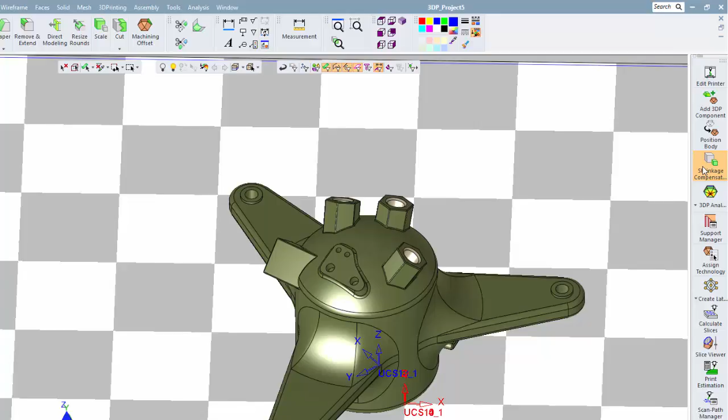We will begin by applying shrinkage compensation to the part model. As each layer of the printed part cools, it will shrink. So we will compensate for this in the X and Y directions while maintaining the same Z height. Next, we will prepare the part for printing.

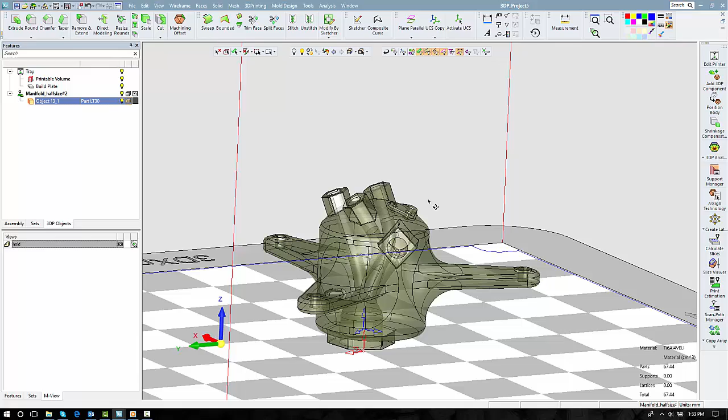Some part features may require us to add material for printing because we will need to machine that away afterward for a good finish. Other features may be very awkward to support, so we may choose to machine those features into the part after printing as well. With 3DXpert's full modeling capability, any required changes to the part can be done easily. In fact, the part itself could be modeled from scratch right within 3DXpert.

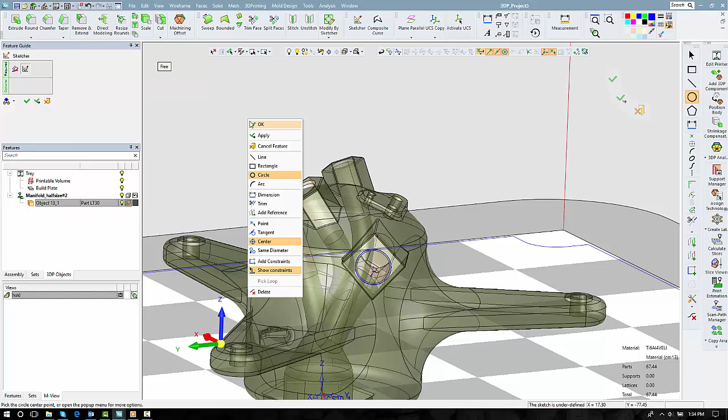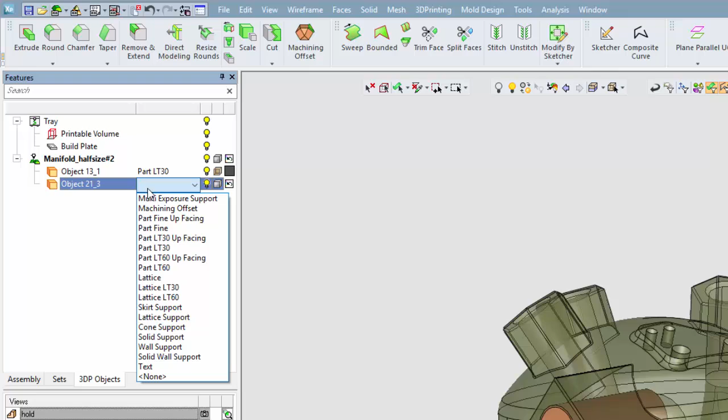So at this point, we're going to extrude a new object that will be included in the printing. This way it will plug that sideways hole that would be very difficult to support otherwise. And since it is a different object, we can include it in the print, but treat it differently than the part itself. Here we can assign a different print strategy. So while the part may be printed in layers of 30 micron, this plug could be printed in 60 micron.

Let's look at another area of the part that requires stock for machining. And again, by treating it as a separate object, we won't need to print it in as much detail as the part itself, especially since we're just going to machine it away anyway.

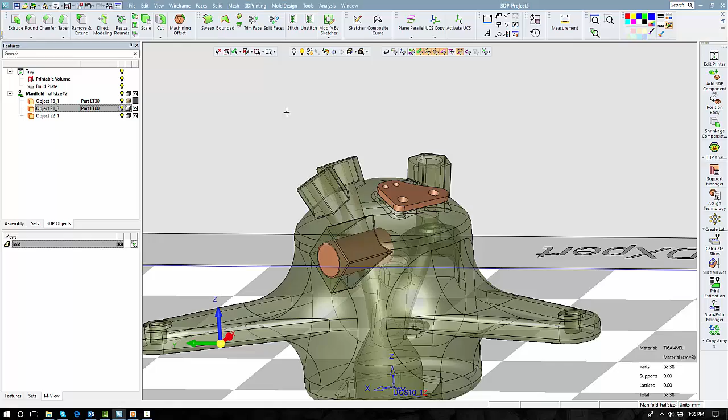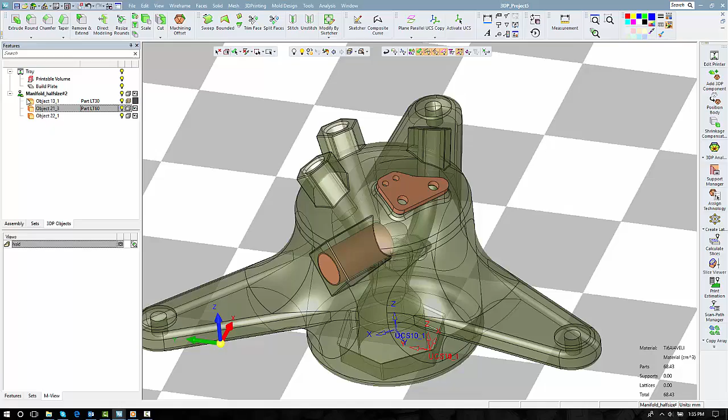Let's now look at a feature called direct modeling. Again, 3DXpert can do all of this modeling because it will work with imported CAD models. This time we're going to actually change something on the part itself. We would like the ring or shoulder around the three outermost holes to be bigger. So we'll use direct modeling to offset and increase the size. And this, of course, adds more material to the printed part in those areas.

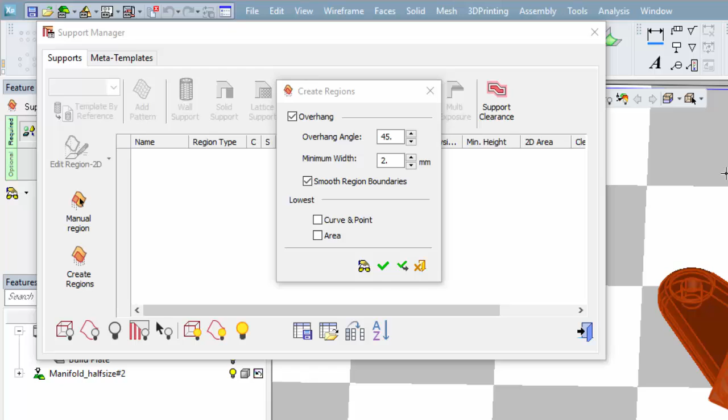We will now discuss the next big topic of this video, which is adding supports for printing. The first thing Support Manager does is help us define the overhanging areas that will require support. This will be based upon how much the machine can handle. Once those regions have been defined, they will be shown as boundaries on the part and also listed in the tree. So again, these boundaries have been created based upon knowing that the machine can handle a 45-degree overhang.

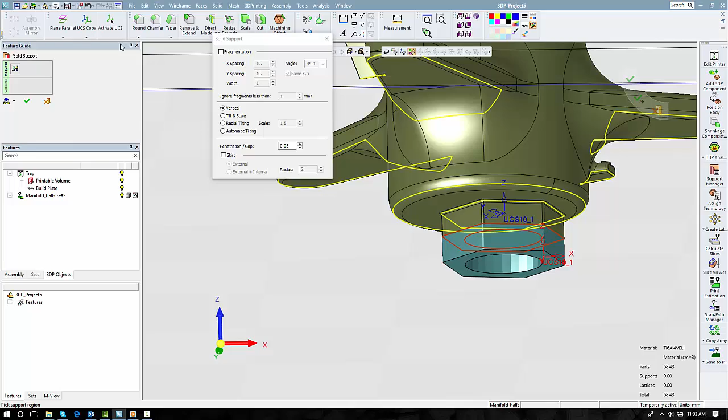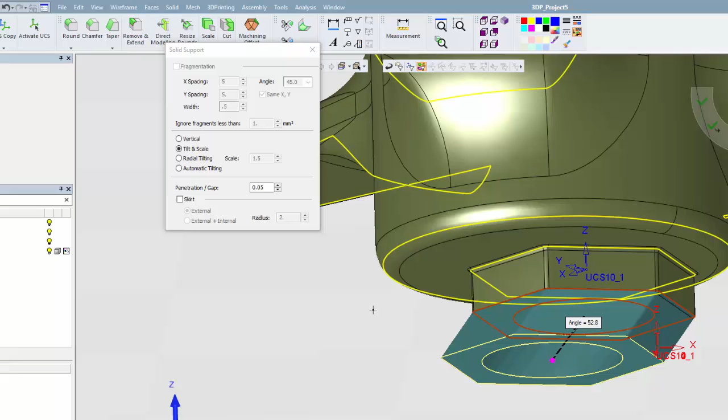We will create our first support type by working with the hexagonal shape at the bottom of the part. The option we will use for this one will be solid support. The functionality and the options available in creating supports is truly impressive. Here we can choose to build the support with fragments and control the size and gap on those fragments. We may choose to tilt the support off center, even having more than one tilt to it.

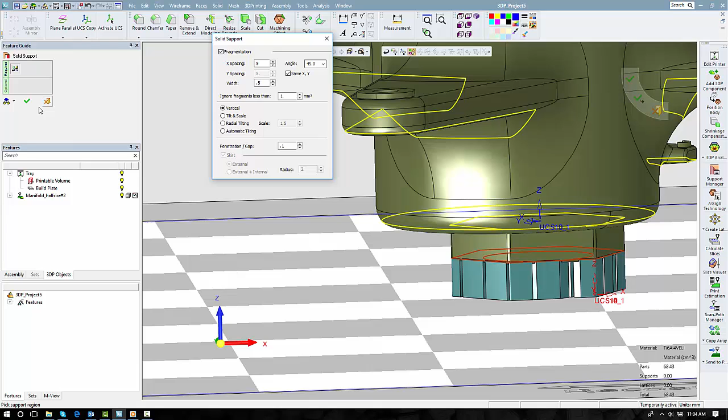For greater strength on the build plate, we may choose to use a radial tilt. Or again, to ensure that the support won't break away from the build plate, we can make the support straight and then put a skirt on it. And with all that being said, for this straight wall support, we will just simply fragment it.

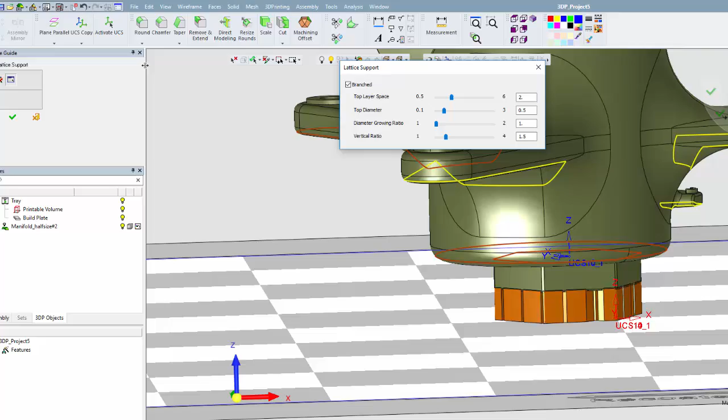As we work through these different regions, we can choose to either select them from the tree or just simply pick the boundary that's been created on part geometry. So we will pick the next region at the bottom of the part, and for this area we're going to create a lattice support.

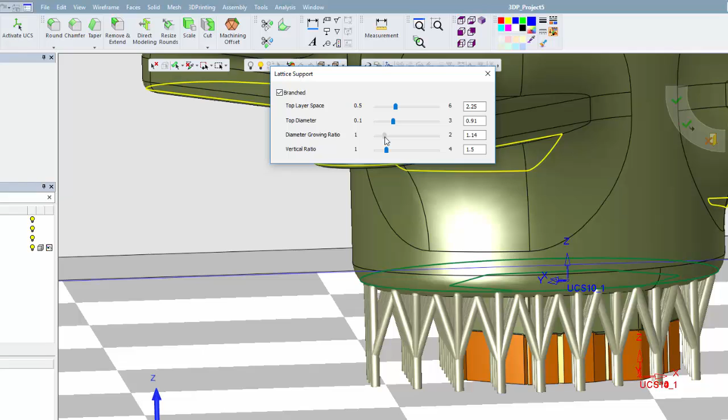So as you see here, the controls are a simple slide bar, or you can simply type the value in yourself if you wish, and then as it is throughout the system, the preview will dynamically update for the changes you make. With diameter growing ratio, it's possible for the support to be much bigger at the bottom and then branch into smaller supports at the part.

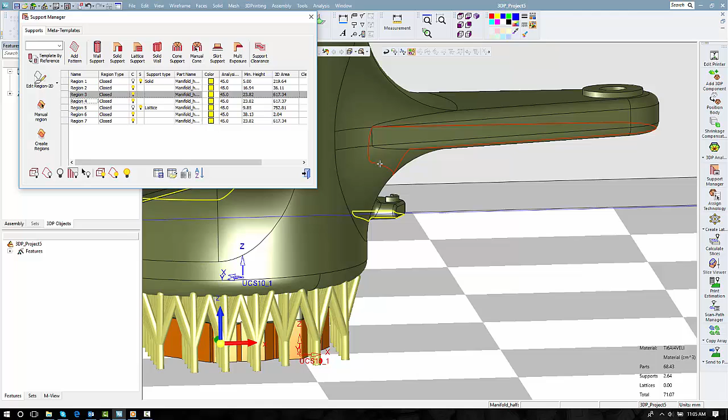That brings us to our next support type. We're going to pan over to the right and then we'll start building some cone supports. As we build supports on the three wings of this part, in actual practice we would select the same support type for each, but for this demonstration we wish to show you a variety of different support types.

And again, we see a lot of options are available for controlling the support geometry. We can vary the spacing of these supports, their overall size, if we want to taper them at all. Also the option of having a sphere at the touch point and how deep that sphere goes into part geometry, or simply not having the sphere as well.

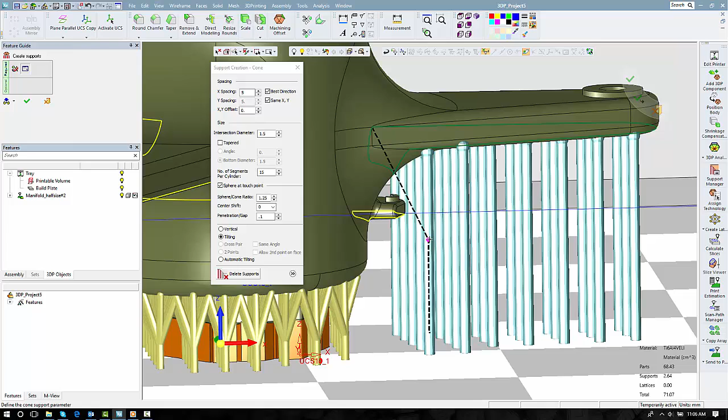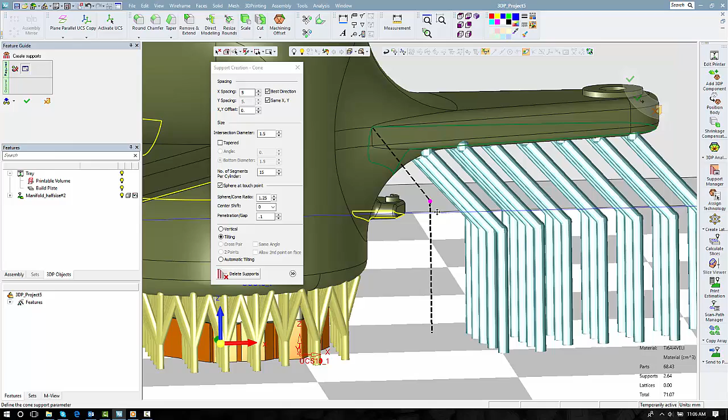It's important that we're able to tilt these cones so that we can reach into areas that are difficult to support, but at the same time we don't want to over tilt them where they themselves become an overhanging face. Once it reaches that degree marker of 45, which we know the machine can handle, you see that the line turns red, telling us that that's not going to be a good support.

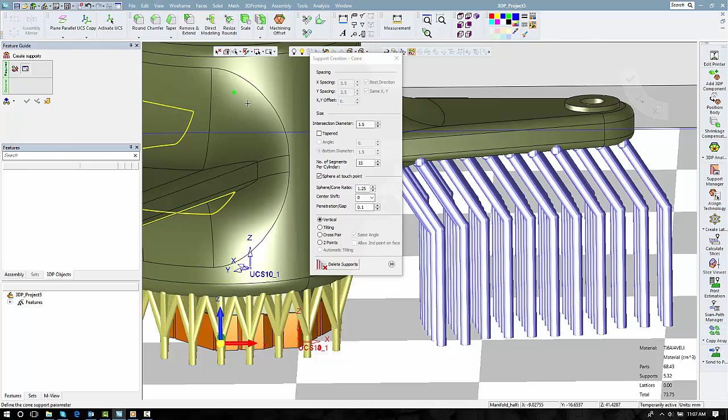So finally, we determine the tilt and spacing and size that we want as we see that the support is reaching in to support that flange, but it's not touching the feature below it. In addition to automatically generating cone supports, we can manually place them exactly where we wish. In this case, we'll position them on the smaller flange and show some of the options available there.

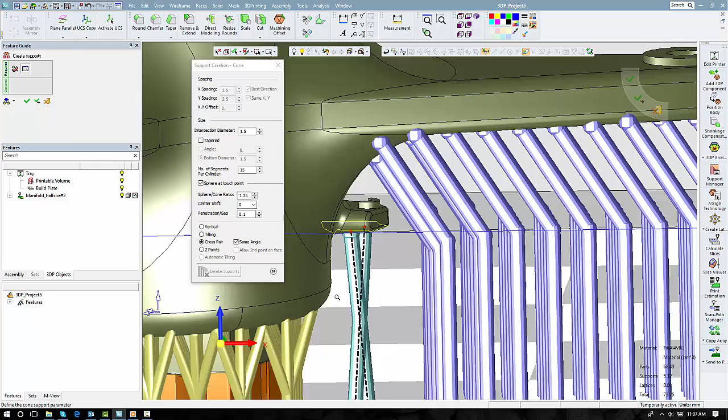We simply pick the point where we want those supports to be, and as you see, all the options are there like before. The options of tilting. Also, since there's 2 points, we have an option of doing a cross pair so that they will crisscross and support each other underneath. And this is great if we think a printed feature is going to bow or flex, and now we can use this crisscross to support it at an angle. Manual cones can be used anytime and in combination with other support types.

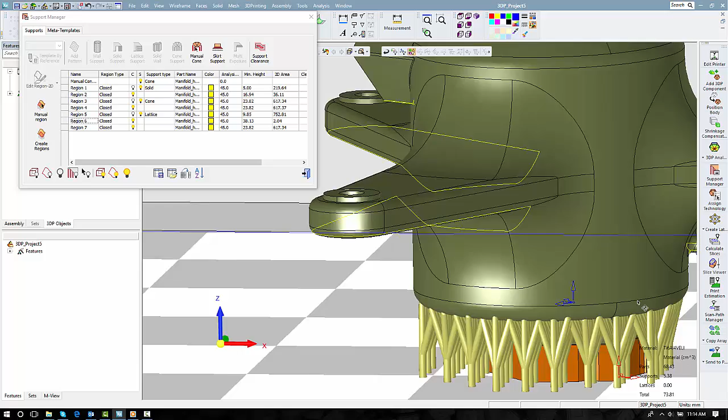This will bring us to our next support type, wall supports, and we will use this with a pattern. There is a wide selection of patterns available that we can pick from. We just simply select the one we want, give it the appropriate size. Do we wish to work with a hatch or fragment it? Or we have also the option of offsetting the outer boundary curve.

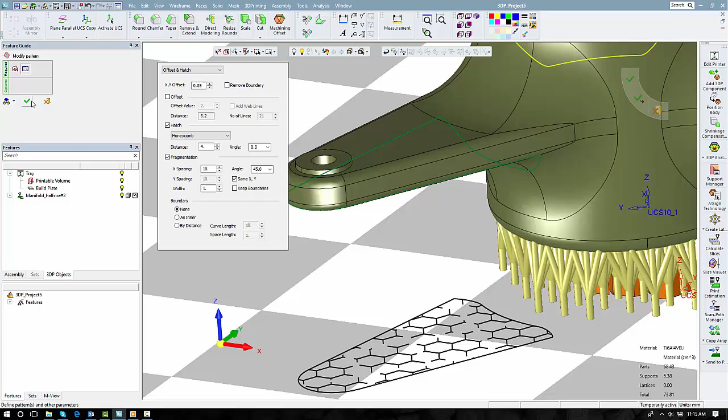This pattern then will be used to create supporting walls inside the boundary. And the idea of fragmenting is so that it is easier to break these supports off the part. Now that we have the pattern set, we can go ahead and start building the wall support. As with the other support types, there is a large selection of useful options available.

We may wish to control the texture or pattern in the side of the walls that allows for easier powder removal. We may wish to control the teeth that hold the part down, and the size and amount of intersection that the teeth have with the part. We may wish to have a solid support at the bottom of this wall where it's attached to the build plate while keeping the teeth against the part where they will be easier to break free.

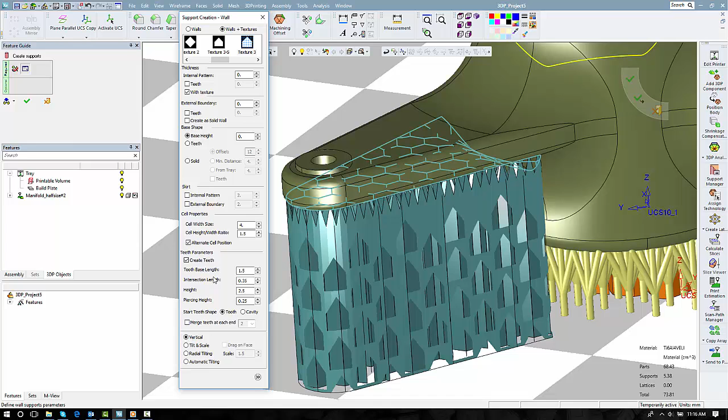As always, there's the option of changing the size of any of these features on this wall support. Plus, just like before, there's the option of doing tilting and scaling and radial tilting so that we can work this support into difficult areas. So in this case, we may not feel comfortable bringing the support straight down and so close to the printed side of the part. With that, we can simply tilt it or shift it at the bottom, having it come in at an angle, and then keeping to the rules of making sure we don't create an overhanging support.

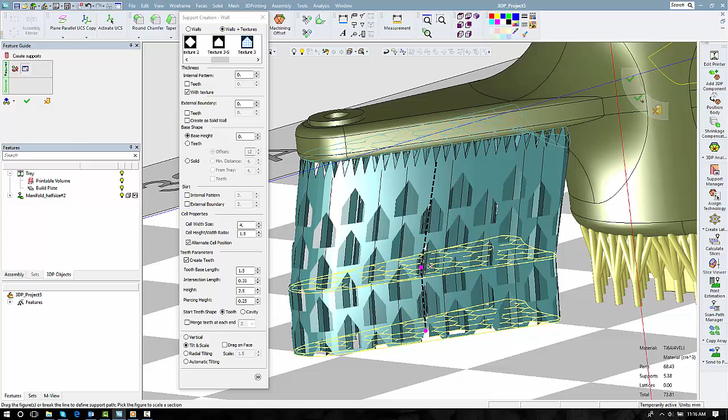Here you can see what the tilt looks like and also how easy it is to control the break point of the tilt. We may wish to use this support several times or in different jobs. One nice feature of 3DXpert is the ability to save these supports as templates so that the exact same support structure can be used again and again.

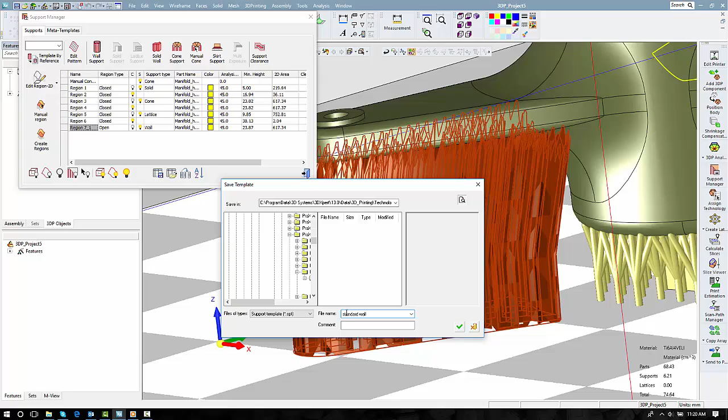And using templates helps ensure the repeatability of the process. With that, we're ready to move on to our next boundary. And here we're going to apply the template we just created. First of all, we'll talk a bit more about boundaries. These boundaries were created automatically, but we can manually create boundaries and we can edit boundaries as well.

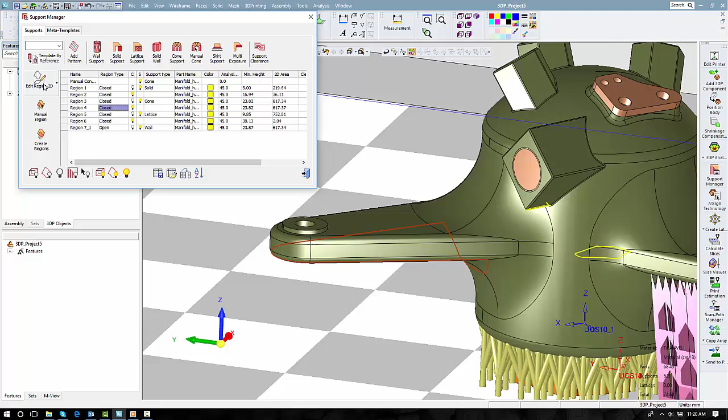So first we're going to edit the boundary. We may feel that using this boundary would create supports that come too close to the printed sidewalls of the part. The boundary curves are projected down to the tray, and while working in Sketcher, we can then delete the curves that we don't wish to keep, and then create new ones using the sketching tools that you see on the right.

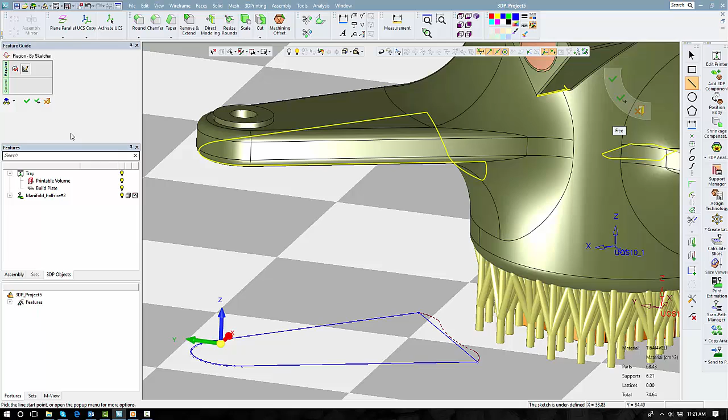So here I have deleted the curves closest to the sidewall of the part, and now I'm going to close the boundary by just creating a simple line across that opening edge. Once that's done, you'll see this boundary is reprojected back up to the part, and you'll see exactly where that boundary now falls on the part geometry.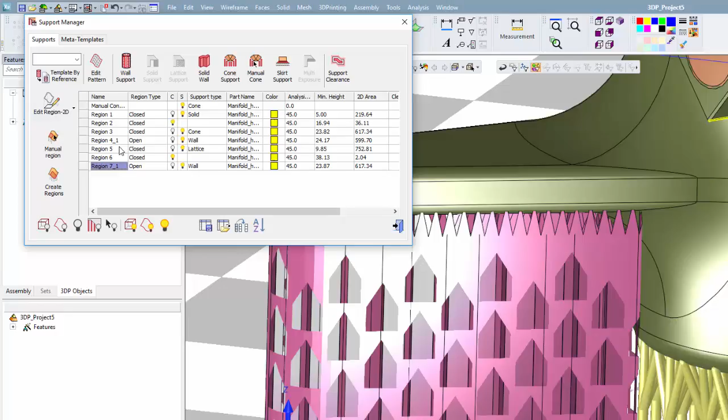From the pull down, I'll then pick the template that we just created, and it will create the same wall structure that we created before. And even after having created this wall support using a template, we can still go back and edit it and change it to whatever we need. Perhaps we may choose to add tilting using radial tilt so that we have a wider base of support, or just using the tilt like we saw before, where we move it out a bit to clear the part.

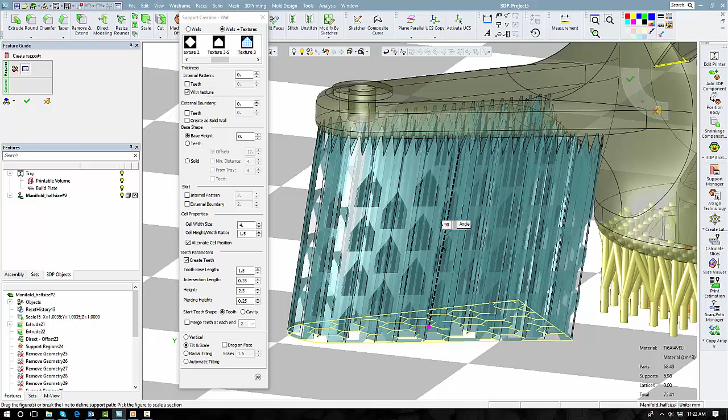In this case, we would like to add a break in the tilt, and then from there, each of these planar references that you see, or you might see the point, the pink point, is a place where we can edit the scaling, where we can increase or reduce the size of the wall in that area. All the supports that have been demonstrated can be added to a template, and then a template can be applied to more than one boundary at a time.

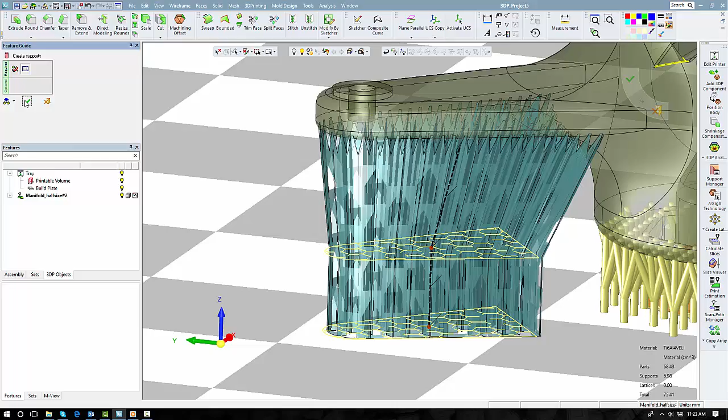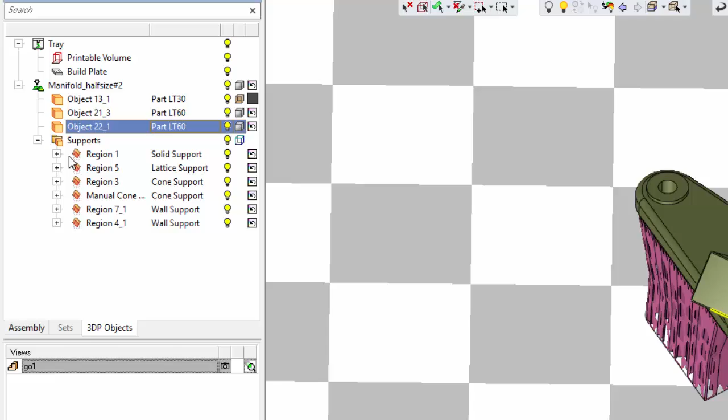Since all the supports are done, we can now look at slicing the part. Now to do that, we want to make sure that all the objects have been assigned an appropriate technology or method. You'll note too that all the supports that we just created all automatically have a build style attached to them based upon the type of support that they are. Also, it's worth taking note that in the lower right-hand corner, you can see we've been keeping track of the material usage both for the part and for all the different supports that we just created.

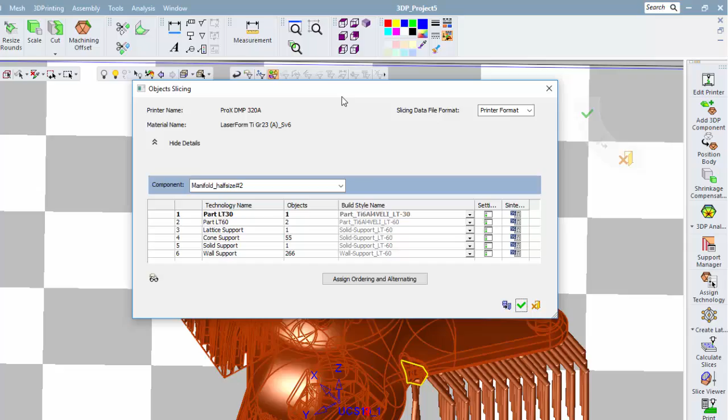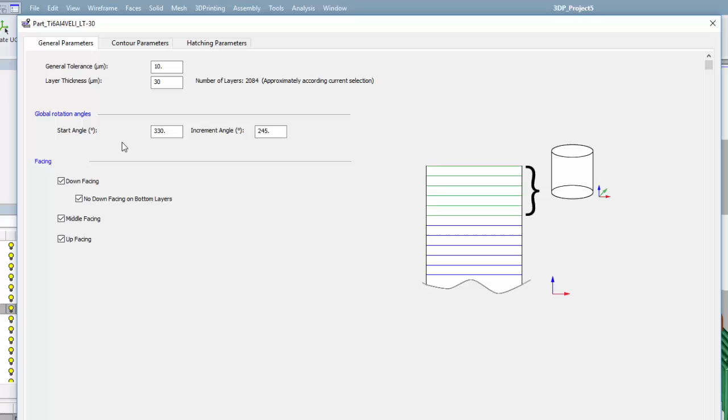This takes us now to calculating the slices. The technology name and build style have been assigned to each of the objects. These different build styles are predetermined and come set up with the material. These build styles that come with authorized materials can be run as is, or going into the settings, it's possible to make some changes to this. For instance, changing the layer thickness by setting the number of microns.

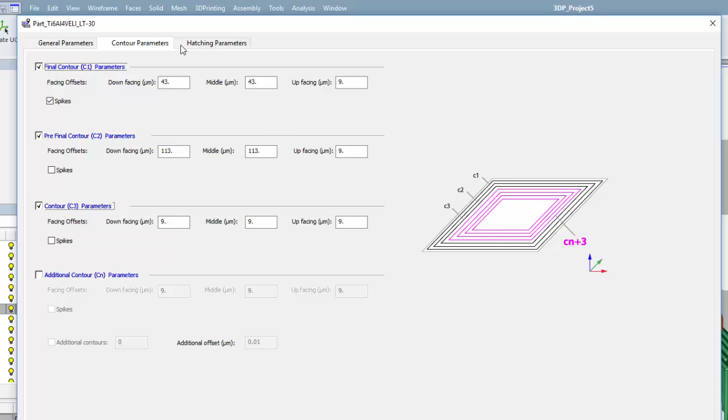While making changes to build styles or creating new build styles is recommended really for experienced users, still a great deal of power and flexibility is available within these settings. This would include such things as controlling the number of contours that will be included in the print, or looking at the hatching, changing the pattern of the hatching depending upon if it's a downward facing area, middle area, or making other changes to the hatching scheme. When everything is set to what we want, we can calculate the scan.

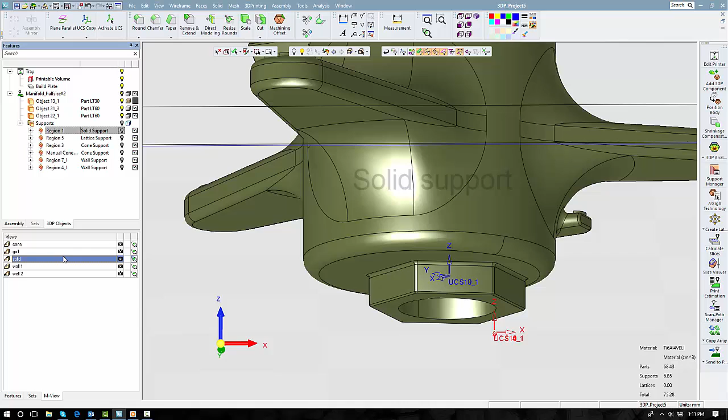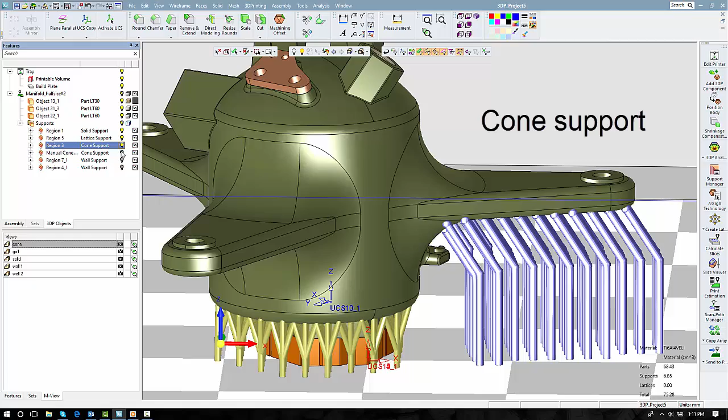Here's a brief review of some of the supports we looked at in 3DXpert. We looked at solid support and the many options available for it. We saw the flexibility of lattice support. We took a close look at cone support, both automatic and also manually creating cones. We saw how easy it is too to create intricate wall supports. And we saw how easily and consistently supports can be applied by using templates.